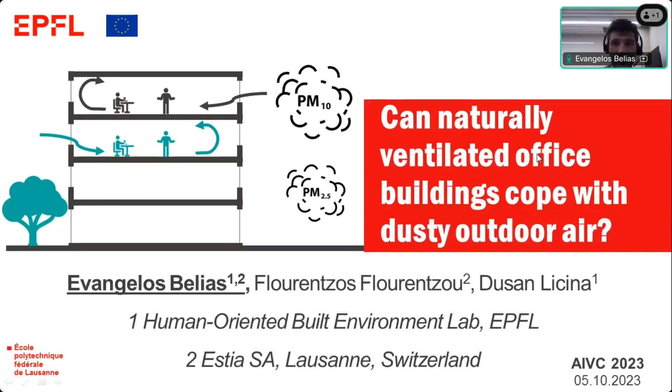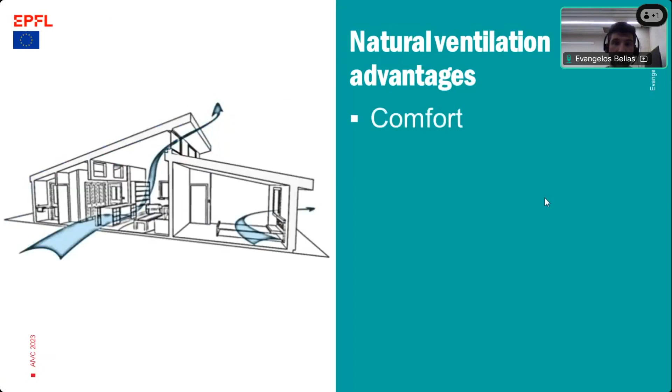To begin with, natural ventilation is a ventilation technique that brings many advantages together. Initially, it permits the improvement of thermal comfort, to reduce overheating and to increase the comfort of people during summertime. It improves indoor air quality if it's operated correctly. And it can do these two functions with low operational and gray energy demand.

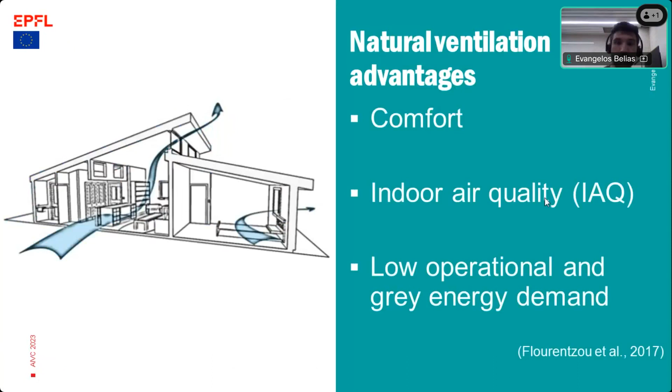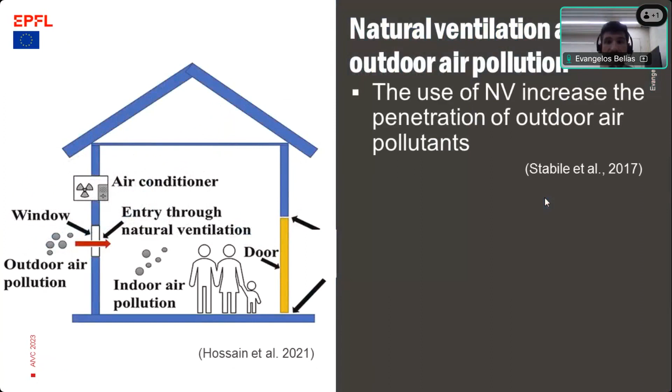However, natural ventilation cannot protect adequately building occupants against outdoor air pollution, as there is no outdoor air filtration or purification. It was found that the use of natural ventilation increases the penetration of outdoor air pollutants. And one of the outdoor air pollutants that is in our interest is particulate matter, which was found, according to epidemiological studies, to provoke the most severe health impacts. And in general, there is a lack of studies that examine the resilience of natural ventilation in polluted areas.

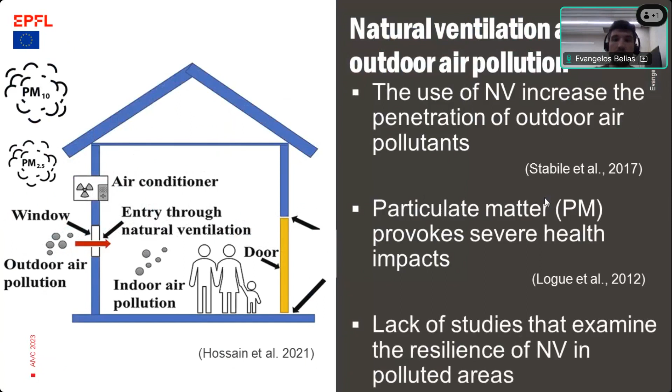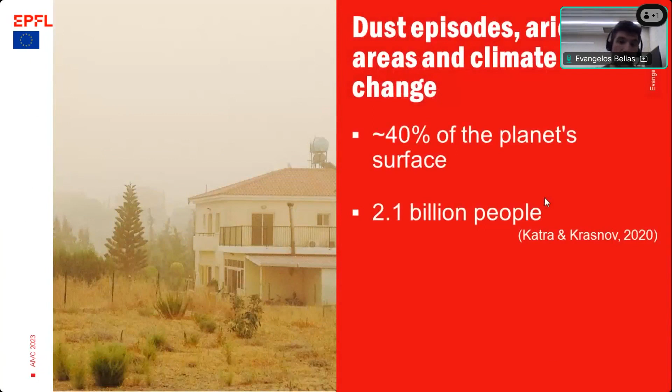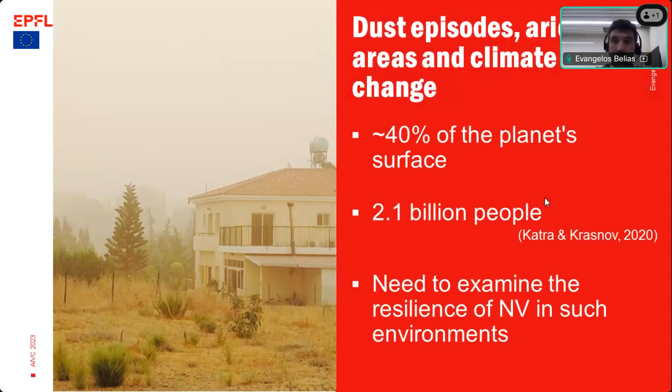And talking about outdoor air pollution, our focus today will be dusty outdoor air. Dust episodes, arid areas, and climate change. Nowadays, it is estimated that arid areas and areas in general that are affected by dust episodes cover around 40% of the planet's surface, where 2.1 billion people live and are affected by these dust episodes. And there is a need to examine the resilience of natural ventilation in such dusty environments. So the question we tried to answer with this study was if naturally ventilated buildings can provide high environmental quality conditions even in dusty environments.

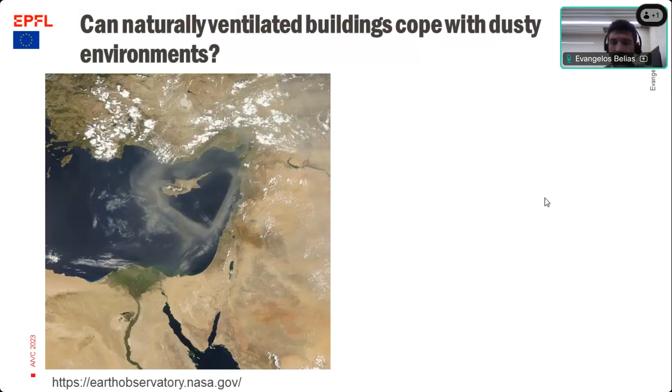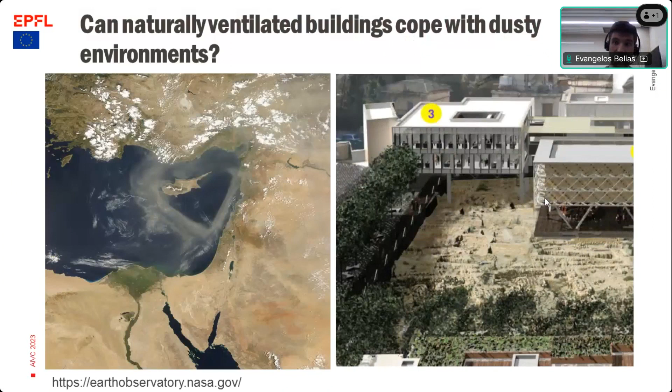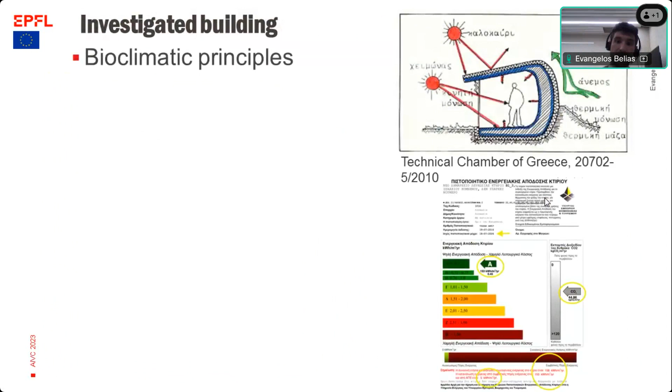To investigate this question, we traveled to Cyprus, an island located in the East Mediterranean Sea, whose climate is arid or semi-arid, and it's affected by severe and frequent dust episodes, where we had an office building which was 100% naturally ventilated and served as our case study building. To give some more details about the building, it was designed based on bioclimatic principles, and it was a Class A building according to the local energy performance certificate.

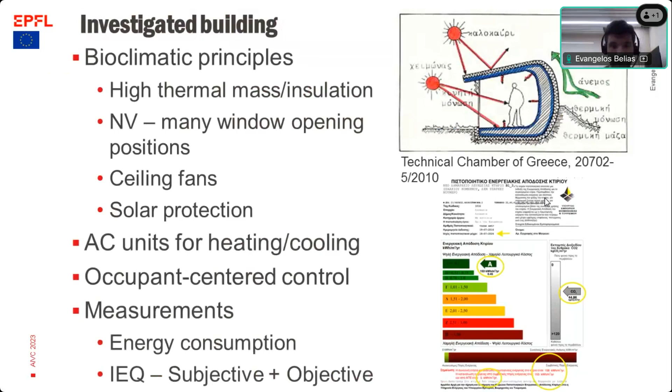It had high thermal mass and insulation. It was using, as I said before, natural ventilation with many window opening positions that were permitting many natural ventilation strategies. It was equipped with ceiling fans and adequate solar protection. It had, however, AC units for heating and cooling when the passive strategies by themselves were not enough to provide comfort. And the occupants were able to control all these elements according to their will to satisfy their comfort needs. In this building we performed measurements for the energy consumption and the environmental quality, both subjective and objective.

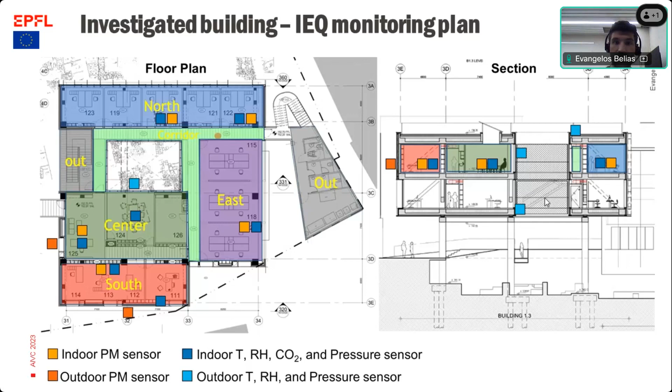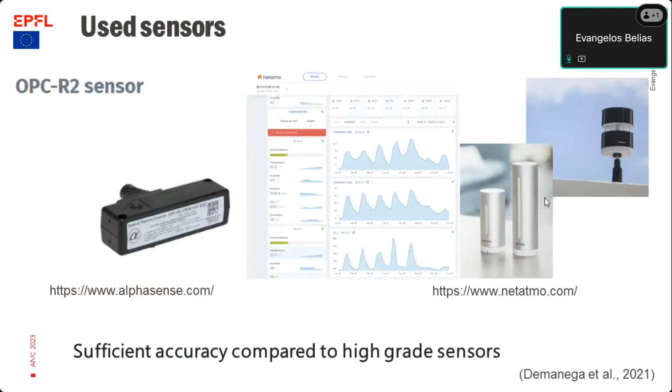Regarding the monitoring plan for the objective measurements, we installed indoor particulate matter sensors in several zones of the building, as well as monitoring the particulate matter levels outdoors in 2 locations, and we were also monitoring other comfort parameters for indoor thermal comfort and indoor air quality, such as temperature, relative humidity, and CO2, again in several spaces of the building. The sensors used for particulate matter were the OPC-R2 sensors from Alphasense, and for temperature, relative humidity, and CO2 the Netatmo, which had sufficient accuracy compared to high-grade sensors.

Regarding PM10 concentration, we noticed that the WHO air quality guideline limits were respected in 2 out of 5 indoor monitored spaces. But generally, the indoor average concentrations during occupied hours were below 20 micrograms per cubic meter, which indicates generally an acceptable indoor air quality, as 20 micrograms per cubic meter is the next intermediate threshold of the WHO air quality guidelines. Compared to the outdoor concentration, which was close to 40 micrograms per cubic meter, which indicates that the outdoor air was inadequate and highly contaminated with coarse particles.

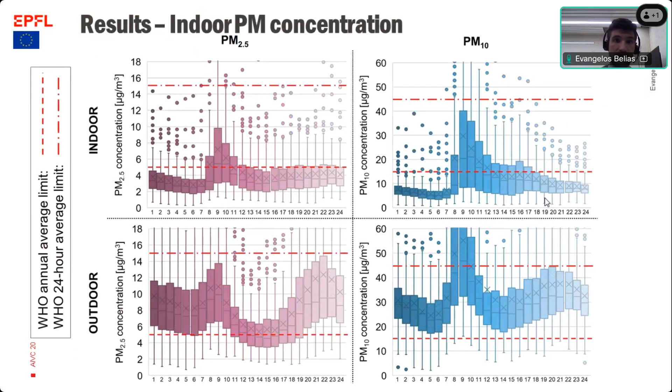This peak in the indoor concentration can also be explained by the outdoor concentrations, as during the morning and the evening commuting hours, we observe high concentrations both for PM2.5 and PM10. So this may also be the explanation for the peak in the indoor concentrations of particles during the morning hours.

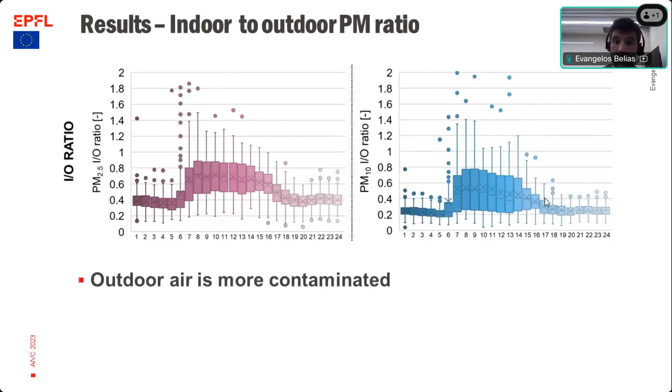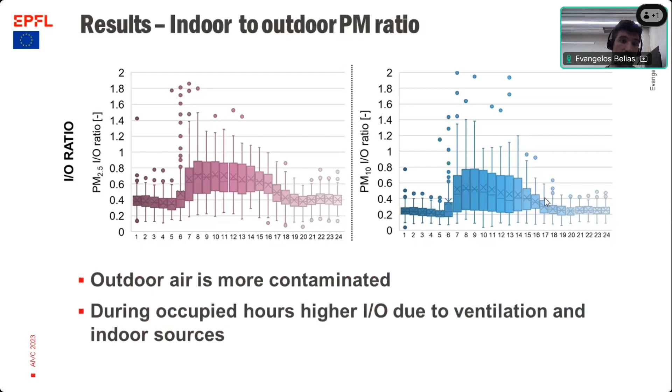Regarding the indoor to outdoor particulate matter ratio, we can see that this ratio, both for PM2.5 and PM10, was the majority of time below 1, which indicates that the outdoor air is more contaminated than the indoors. And we can see that during the occupied hours of the building, between 7 in the morning to 4 in the afternoon, the indoor to outdoor ratio was higher than the other hours, indicating that we had sources of particles in our indoor spaces, and these sources were mostly the outdoor air ventilation and the indoor sources of resuspension, as we didn't have any other significant indoor sources.

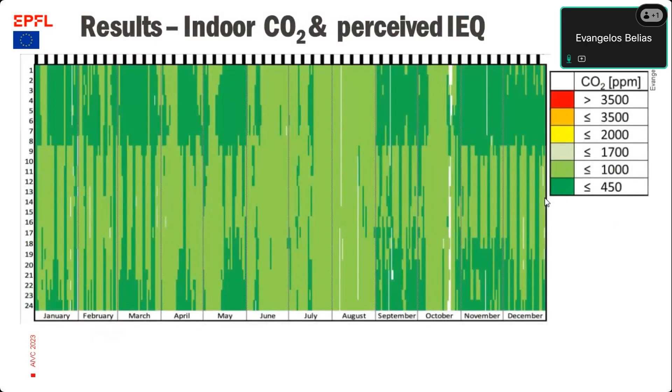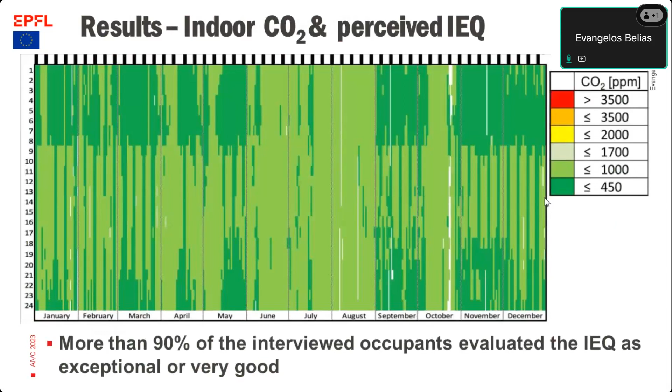So regarding the indoor CO2 concentrations and the perceived indoor environmental quality, these are the results from a typical space of the building. As we can see, the indoor CO2 concentrations remained below 1000 ppm for the vast majority of the time, more than 90% of the time, which indicates an excellent indoor quality in terms of CO2 concentration. And regarding the subjective indoor environmental quality measurements, we observed that more than 90% of the interviewed occupants evaluated the indoor environmental quality as exceptional or very good.

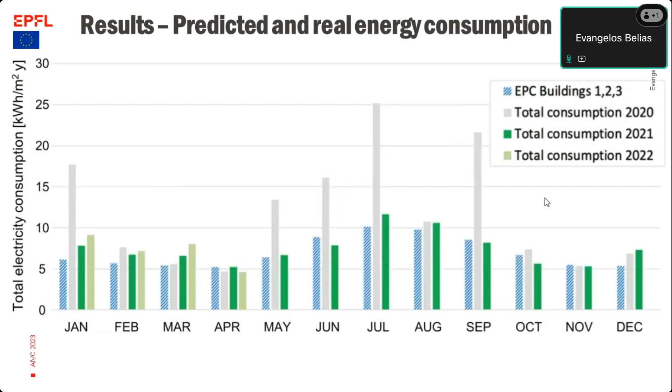When we located the problem and we solved that, the actual consumption of the building was really close to the theoretical one, indicating a very small performance gap, which was not significant, and proving with the measurements that the building was actually a Class A building.

To summarize, we observed indoor PM2.5 levels compliant with the WHO air quality guidelines in 4 out of 5 monitored spaces. The PM10 levels respected these limits in 2 out of 5 monitored spaces. Indoor CO2 concentrations remained below the 1000 ppm limit for more than 90% of the time. More than 90% of the interviewed occupants evaluated the indoor environmental quality as exceptional or very good, with all these results leading us to the conclusion that naturally ventilated buildings, if they are well designed and operated, can offer high indoor environmental quality with low energy use, even in dusty environments.